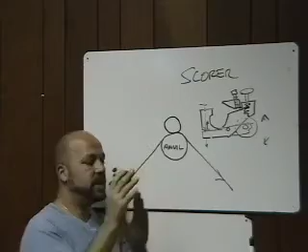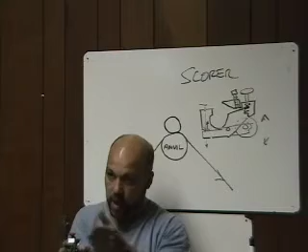Okay, so now let's back up a little bit. This little device right here, we're going to position this on the shaft relative to the web. Let's say the web is running like this at a cutting station. We're going to position this cutter centered on the web, or in its position. Because we know we always reference the center line of the press in all the positioning of our tooling and paper, we're going to do the same thing with this. So we can predict where this needs to be if we know where the material is being cut and where that cut is relative to the center of the machine.

Before we commit this to where it's positioned on the shaft, because once we clamp it down we have no lateral adjustment, we want to make sure we start with this in the center as much as possible, then fine tune the position with this knob. In order to fine tune the position, we want to start off with an equal amount of adjustment in either direction, so that whichever direction we need to adjust, we have adjustment.

So we do that by turning this all the way in one direction. I noticed that if you go all the way, the blade actually touches this holder. So don't ever turn it all the way to where the blade is not free. I'm going to just touch this holder, and give it one turn.

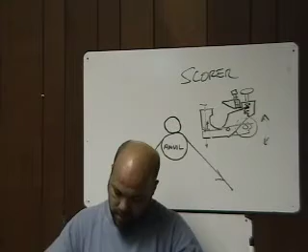Using a reference, so I'll use that as my starting point in this range. I'm going to neglect that one turn so I have clearance, and I'll never think about that part. Always have that clearance. Now I'm going to turn it and count the number of turns all the way the other direction. That's one turn, 2, 3, 4, 5, 6, 7 turns. So now I have 7 turns from one end to the other.

So I'm going to come back 3.5 turns. 1, 2, 3, and a half. Now I can turn it all the way that way, 3.5 turns, until I bottom out. Or I can turn it this way, 3.5 turns, until this gets close but doesn't touch this thing, and that's my adjustment. So now I have this centered, with equal distance adjustment.

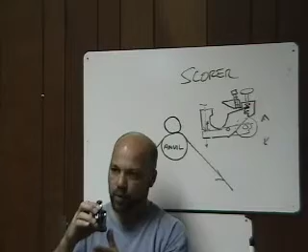Now is when I will take this device, put it on the shaft, and position this wheel where it should go based on the references described earlier, wherever that may be. Once it's clamped down, or close — not clamped down, but just lightly snug around the shaft where I can still adjust it a little bit, but it's kind of held — I'll bring it and touch it to the paper. I'll touch it to the paper first, the paper on the end.

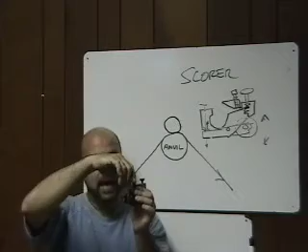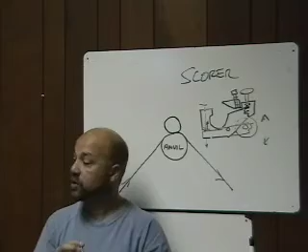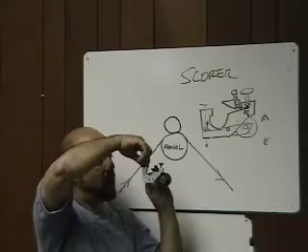Then I will rotate this back, let's say 1 turn. Touching the paper, just right. Actually, let's do 2 turns. We can back out 1 turn. So I just did 2 turns on this back adjustment, which just about makes it flush. So maybe let's see what flush does. Yeah, 2 turns is just about flush. So we'll go 2 turns on this knob, present it to the paper, and clamp it down. Then when we back out 1 turn, what that does is it still keeps spring tension so that this screw doesn't turn freely.

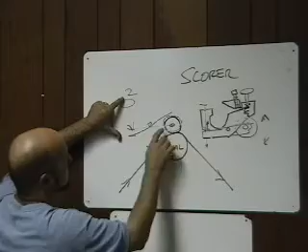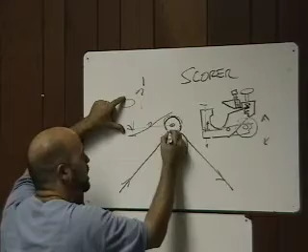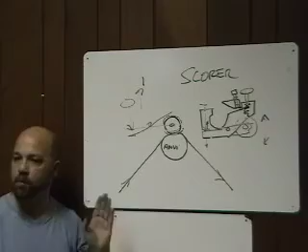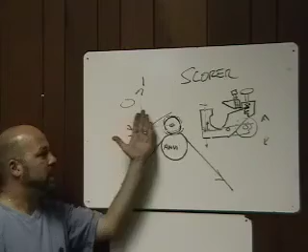But this is what happens. Let's just say you've got this lever here, and you're applying the screw to it right here. I touch this, now I turn 2 turns, which pushes this down, let's say to here, pushing that up about the pivot point. Let's just say it just brought the wheel up 2 turns worth. Now I slide this down till it touches. Then I rotate it back out 1 turn until the wheel touches again. What that means is — actually, the wheel's already touching — but if I back it out 1 turn, that means it's free, in fact if the angle wasn't there, this wheel would come down 1 turn's distance worth into that roller. So what we've done is ensured there's contact by a turn, and any microscopic irregularities are more than compensated by this. This thing, when it's finally set up — this is the key — 1 turn backing it out would just start to free it up.

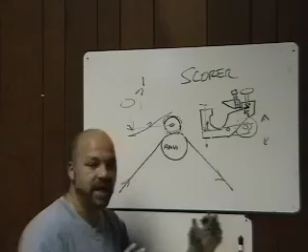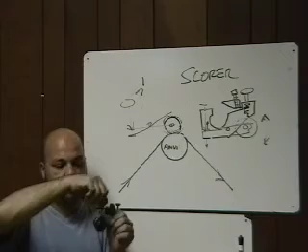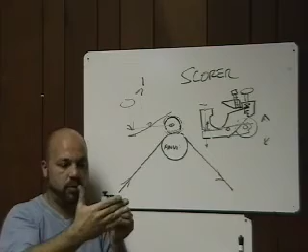Is that better? So the sequence is: start with this backed out, center this all the way, then go all the way this way — I know it's 3.5 turns — 1, 2, 3, and a half. Now I have that centered, backing out the spring tension all the way. Put this on the shaft. Now turn this, 1, 2 turns. Touch the paper, lock this down — it's in when it's in center. Lock it down, back it out 1 turn. I'm done.